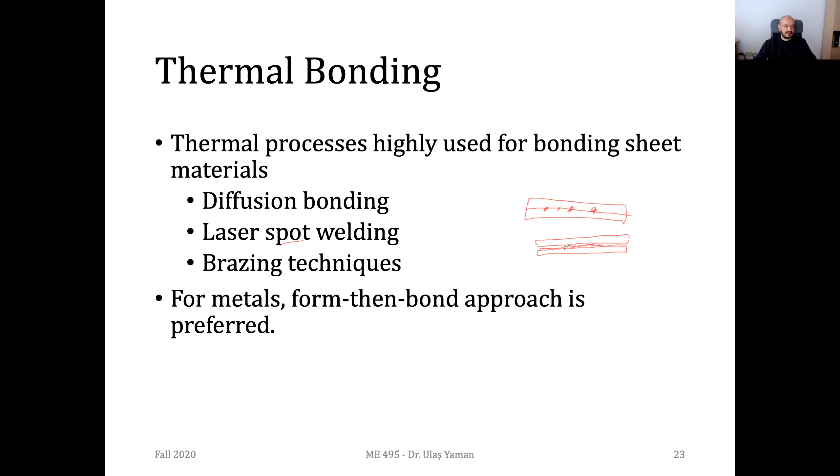Let's briefly look at a variation of sheet lamination process called shape deposition manufacturing. We cannot clearly say it's a sheet lamination process; it's a kind of combination of another additive manufacturing process and sheet lamination. With the help of other additive manufacturing processes, we obtain near net shape and then do some finishing by machining. In summary, you deposit some material and then do machining, and the accuracy, quality, and material will all depend on the type of manufacturing process you are using.

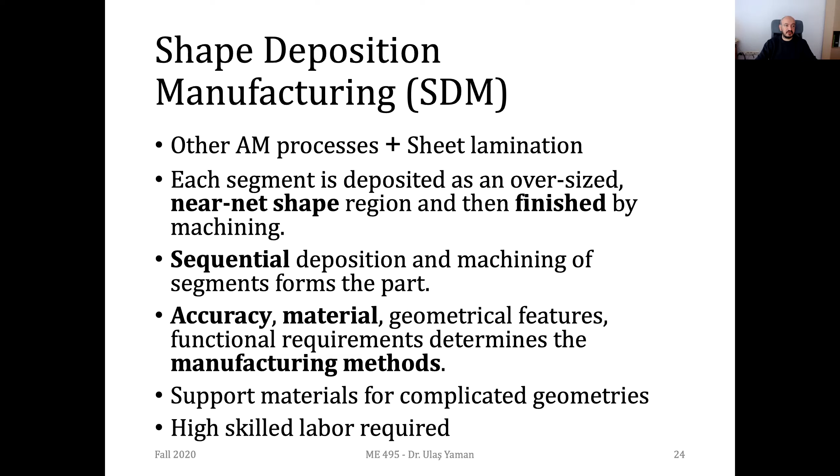If you have overhanging features, you need to use some support structure, and you need highly skilled labor to perform this specific process. The fundamental cycle is: you deposit, shape it with your cutter, and then embed some particles or components—a very nice feature of shape deposition manufacturing. You may embed sensors, actuators, or electronic boards. You can embed such a part inside and then deposit another material and again do the machining. You can continue this process as many times as you like, but we don't have an exact commercial system employing this approach.

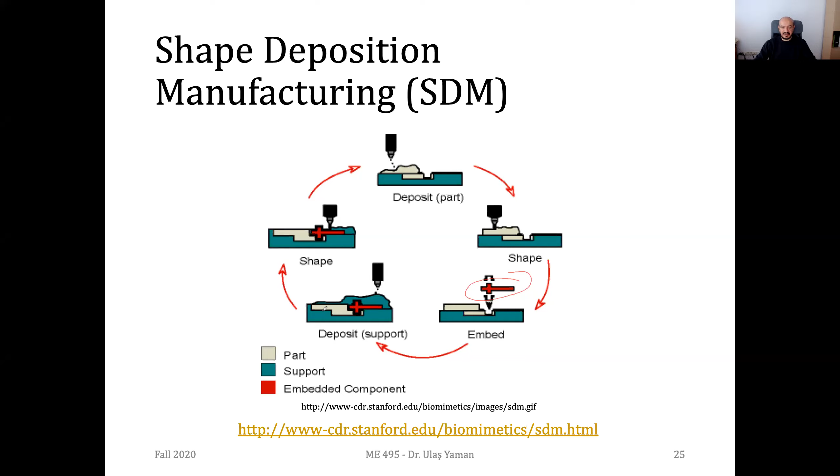Then we have another variation of sheet lamination processes called sheet metal clamping. As the name implies, we will be using sheet metals, but they will not be joined together with adhesives or other thermal bonding processes; we will simply be using clamping forces.

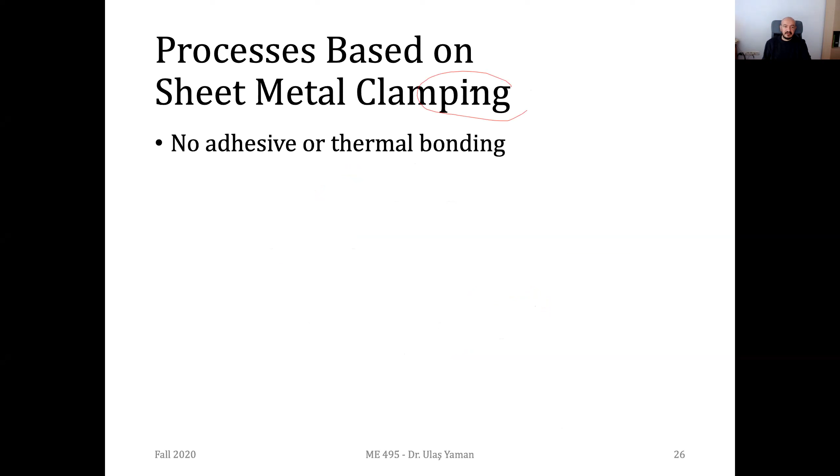And in order to have a proper clamping operation, we need to use some bolts and special clamping mechanisms so that the accuracy will be higher.

The advantage of this process is that it's very inexpensive, since all you need to do is machine the layers first and then put them on top of each other, like in the case of Stratoconception.

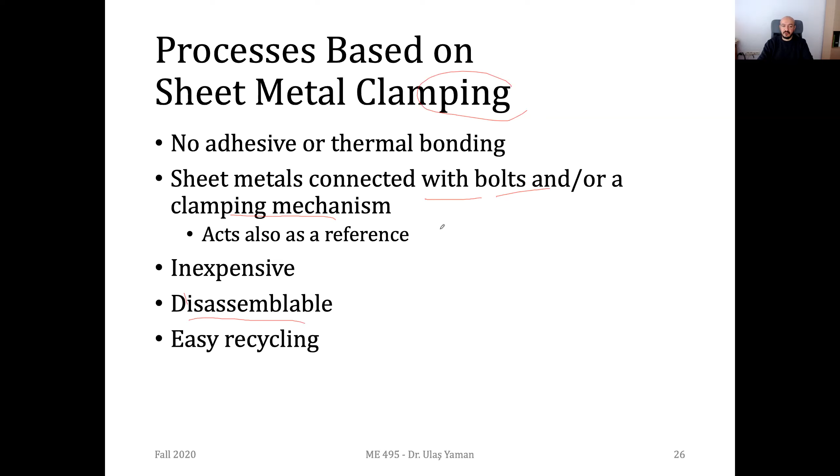Another advantage is that you can easily disassemble them by opening the bolts or screws. You can simply remove them, disassemble, do modifications, and then assemble again. Since it's quite disassemblable, you can easily recycle the unnecessary portions.

The important thing is that once you are clamping, these clamping forces should always be perpendicular to the laminate interface. So if these are the layers, the sheet metals, then your clamping force should always be perpendicular to this laminate interface, which is the interface between the laminates.

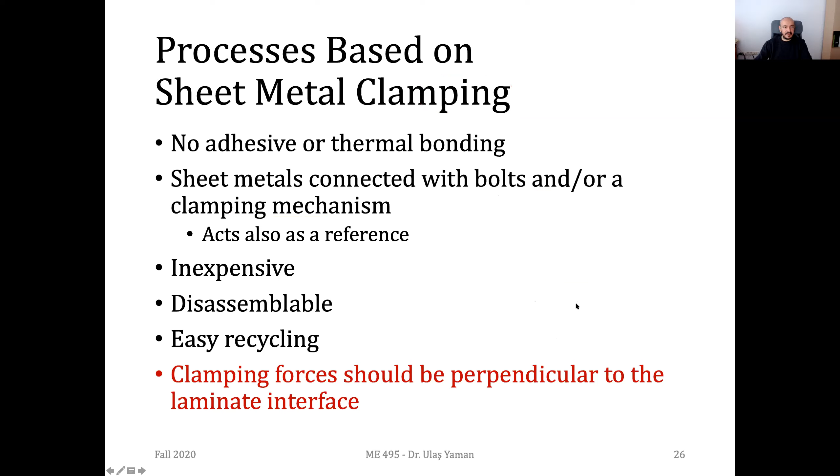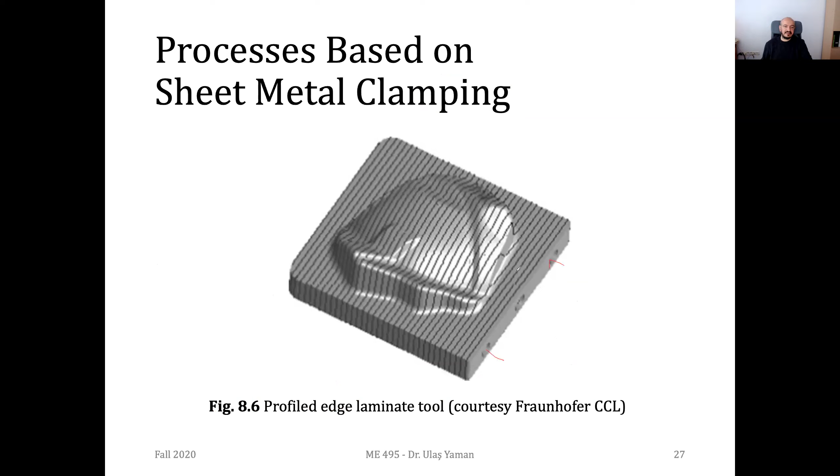Here's an example from the Fraunhofer Institute. You have these sheet metal layers, and you can see some guideways here. Probably they are putting some rods inside so that it will be easier to align these sheet metals.

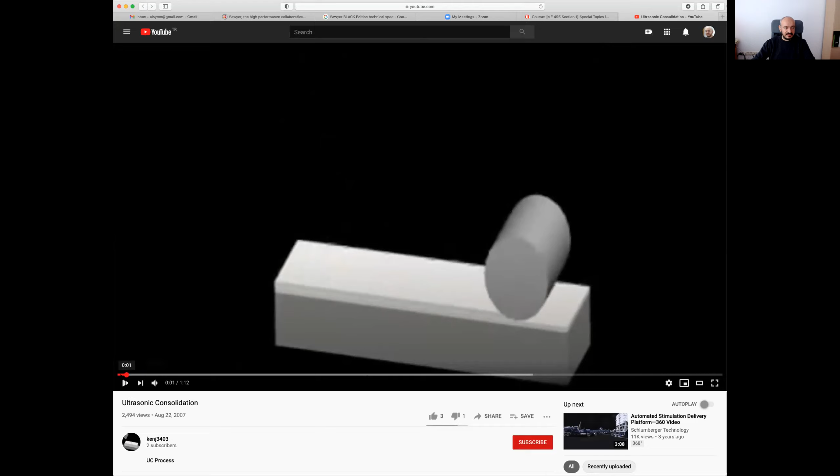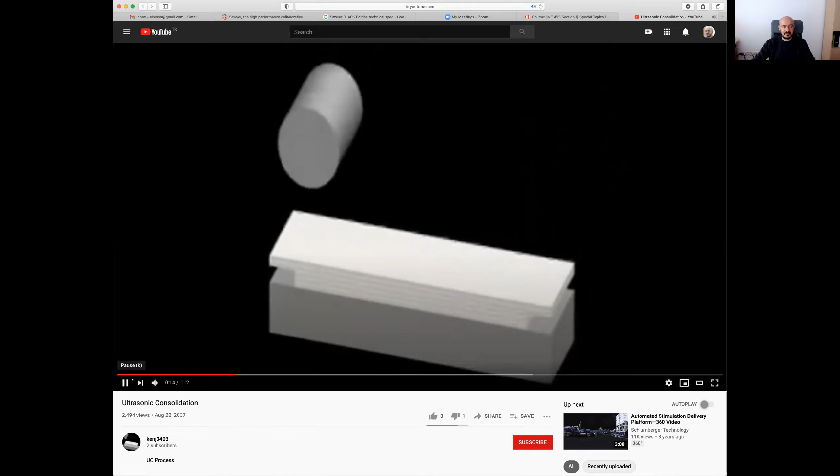This is the sonotrode bringing another sheet. Usually they laminate 4 sheet metals and then later do machining, but in this example they are laminating 3 of them and then doing the machining operation.

You see they have an internal feature, right? Since we are laminating a continuous material over the opening regions, over the channels, you can easily obtain such internal features.

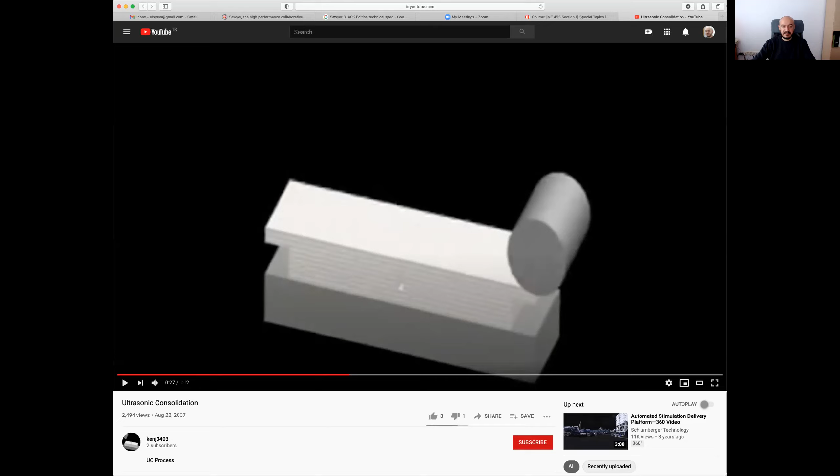But I think they are going to cut it. They don't need to cut it if you want to have a hole inside, a kind of internal feature, but depending on your case, you may do machining or not.

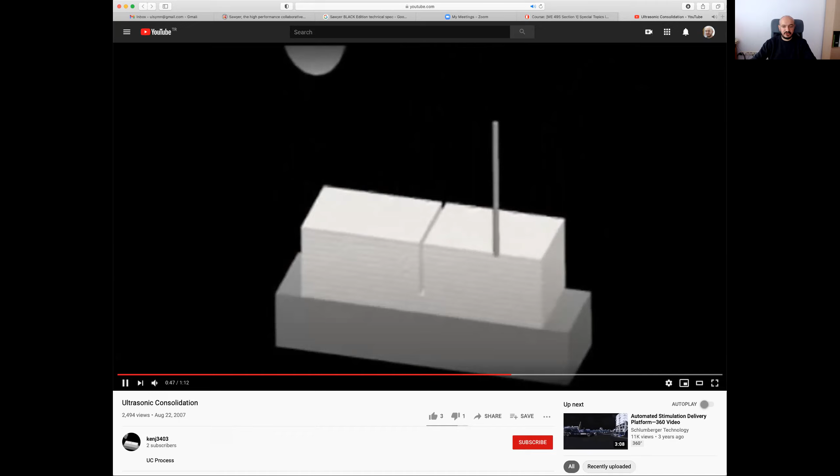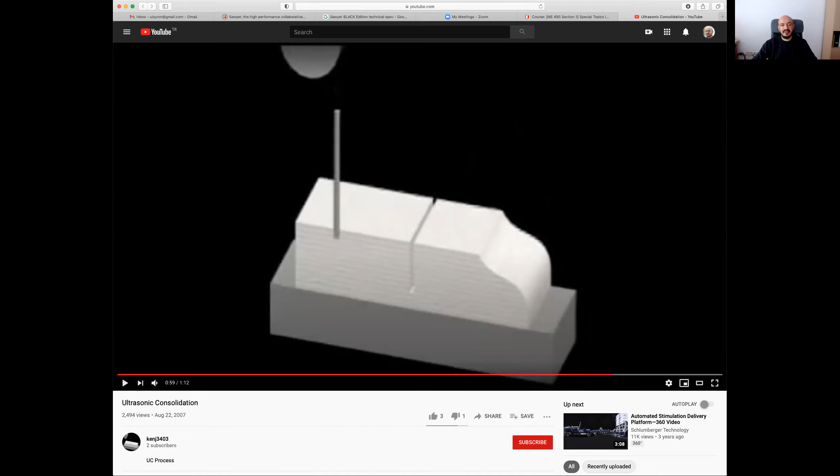Yes, depending on the machine you have, the number is usually constant, since the tool is not capable of machining just a single layer. Since it's a very thin layer, they usually have 3 or 4 layers to be machined.

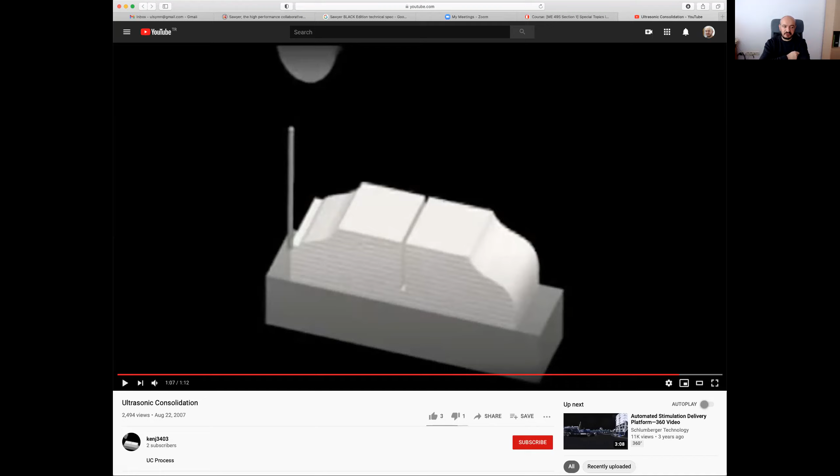But the thickness of the metal is very low. You may have just 1 millimeter, maybe less than that, depending on the type of sheet you are using. Probably that will be enough.

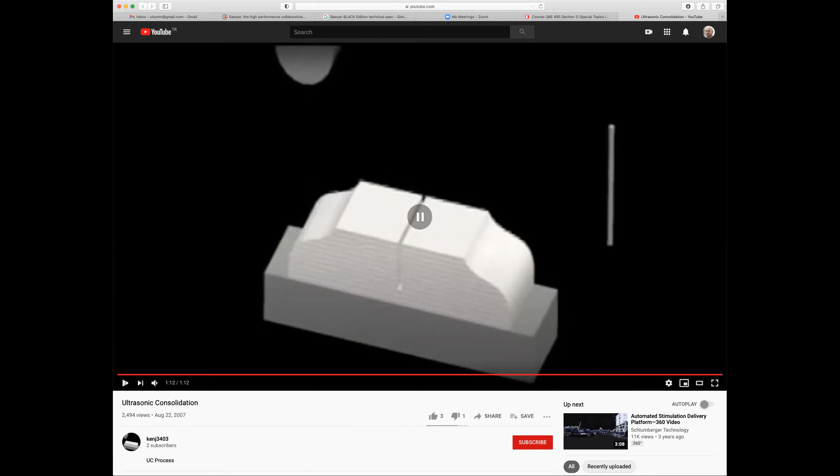So these are the fundamentals of ultrasonic additive manufacturing.

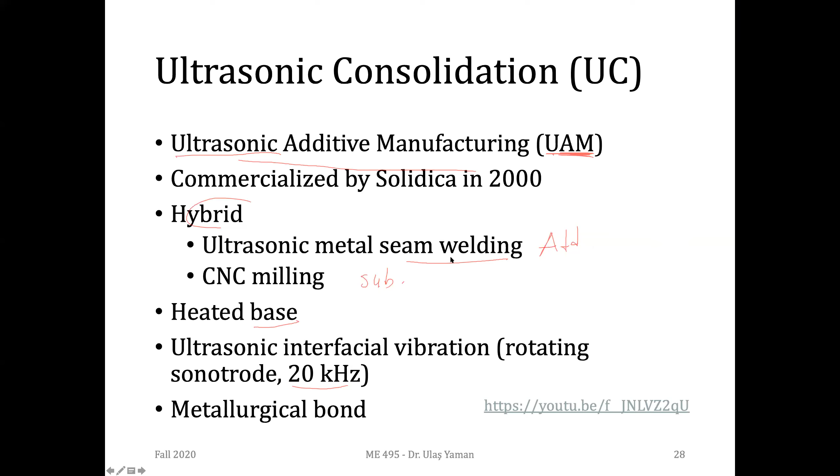Obviously, while we are doing a kind of welding, ultrasonic welding, we will have a metallurgical bond between the layers. Here's another nice illustration.

You see we start with a heated base. This is important, otherwise your foil, your sheet metal will not stick to the base platform. Depending on the thickness of your part, you may have many sheets on the same layer. As you see, right now we have 4 of them, and I think it needs 3 more, so 7 sheet metals will be spread on this layer.

While spreading it, this sonotrode is rotating and it's applying a force. This is the force applied by the sonotrode. This is a side view, by the way, showing the previous layer and the next layer. With the help of the high frequency vibration, we will have a kind of connection between the layers. This is a close-up view - this is 20 micrometers, and we will have metallurgical bonds between the layers.

And this is another side view. Our sonotrode is rotating and also moving to the left, and it's actually laying out this sheet metal.

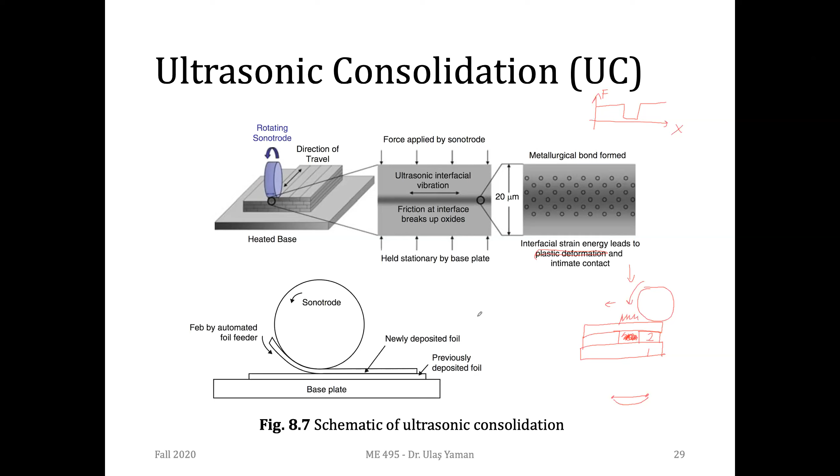We have, let's say, this is the frequency, say some hertz, and we have an amplitude, but not that much. And the frequency is exactly at 20 kilohertz.

And we need to apply force, otherwise it will just pass through the sheet metal and it will not be able to join the parts together. Force is an important issue, but the amplitude is not much. It's not moving - actually you cannot see the sonotrode moving in the Z direction. It's very little, around some micrometers.

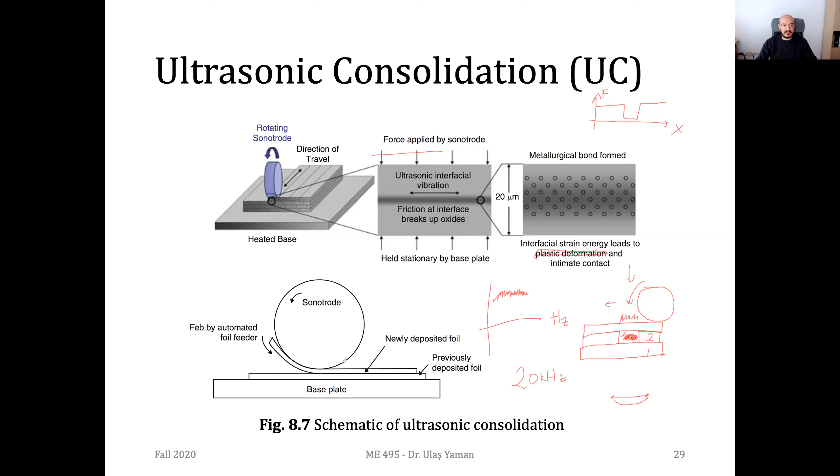In the example animation, we saw it laying out 3 sheet metals and then doing machining, but for most of the time, companies prefer to use 4 layers. They deposit 4 layers of metal foils and then do machining. We call these 4 layers one level in ultrasonic consolidation, or ultrasonic additive manufacturing.

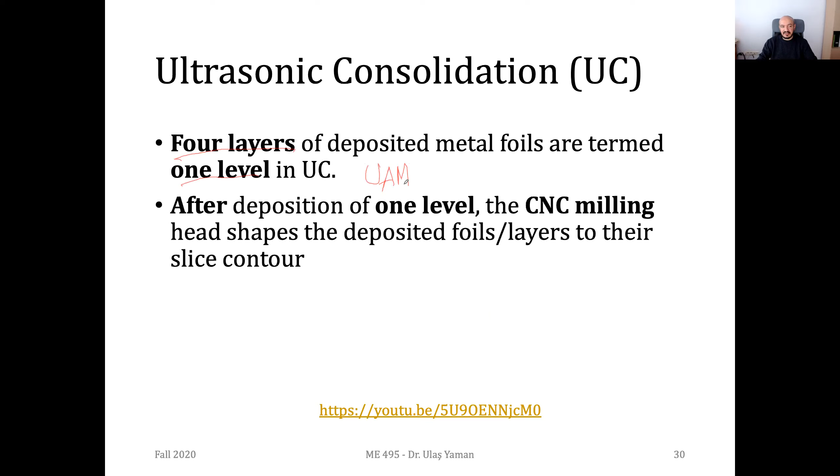After you have one level, you need to do machining around the contours. You repeat these processes until you have the final part. So you can say that this is a kind of bond-and-then-form process.

Let's have a look at this video. Let me share it. It's from Oak Ridge National Laboratory in the United States. The company is Solidica. This is again an animation, but a much better one.

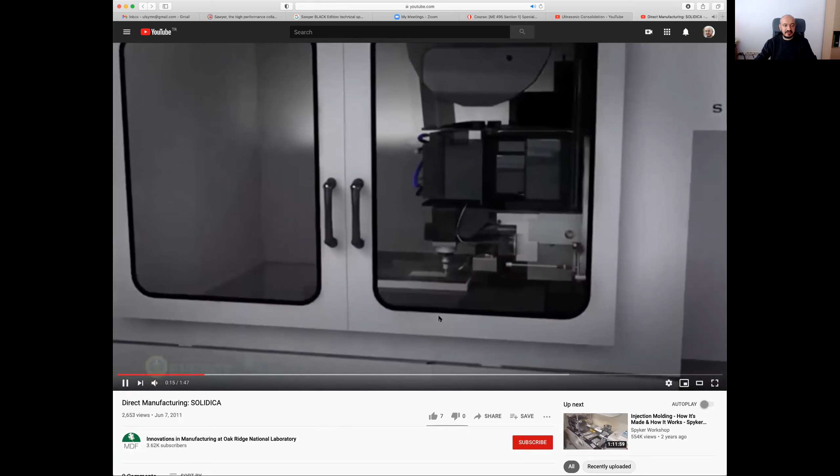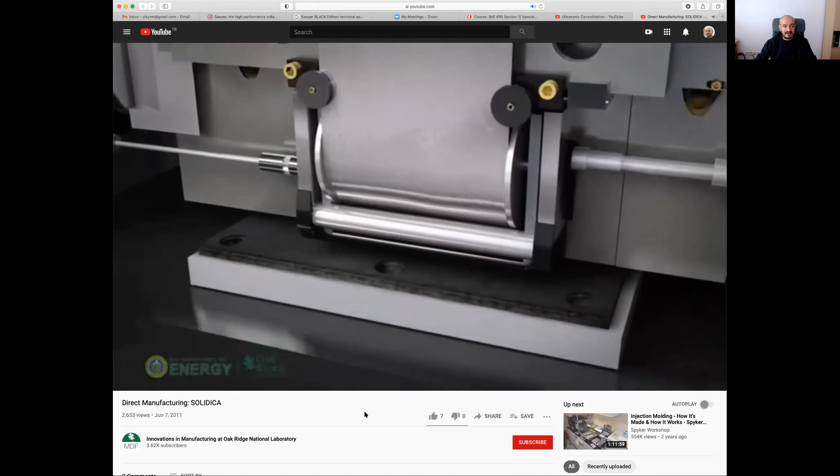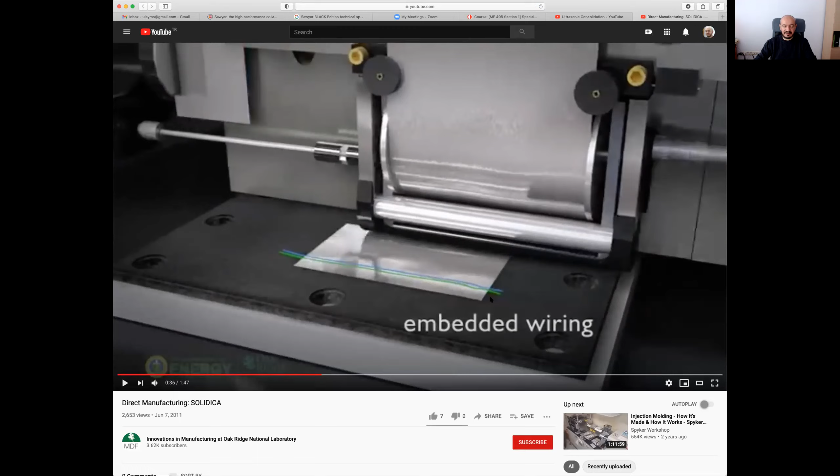Machining, and then sheet metal is deposited. Now you can see the sonotrodes underneath. The advantage of this process is you may have some components. Actually, components are quite challenging, but embedding wires is not that difficult. You can have such wires inside your part.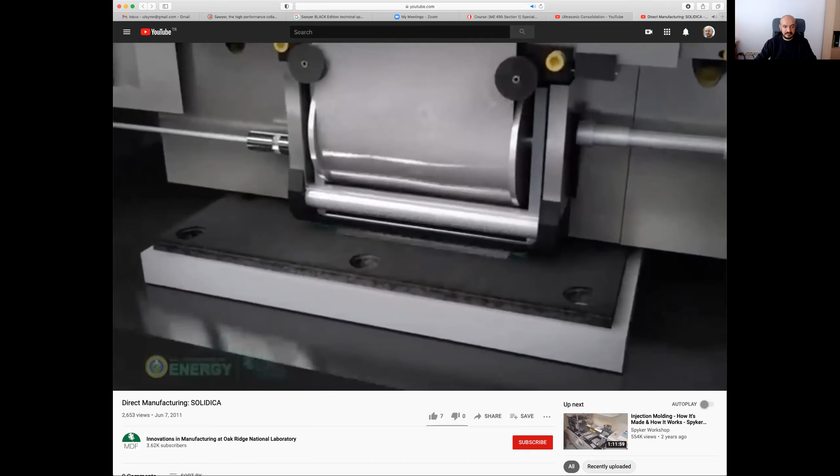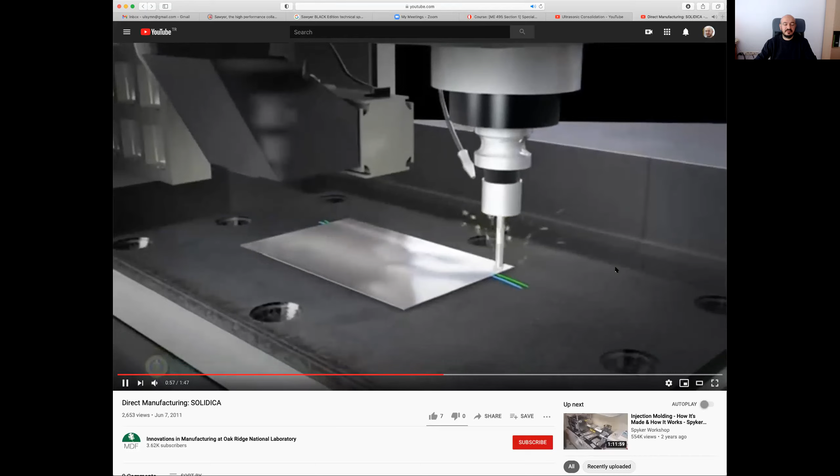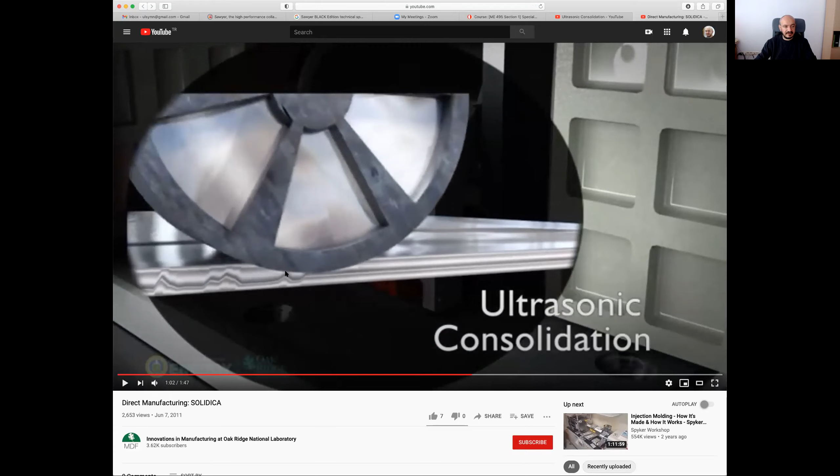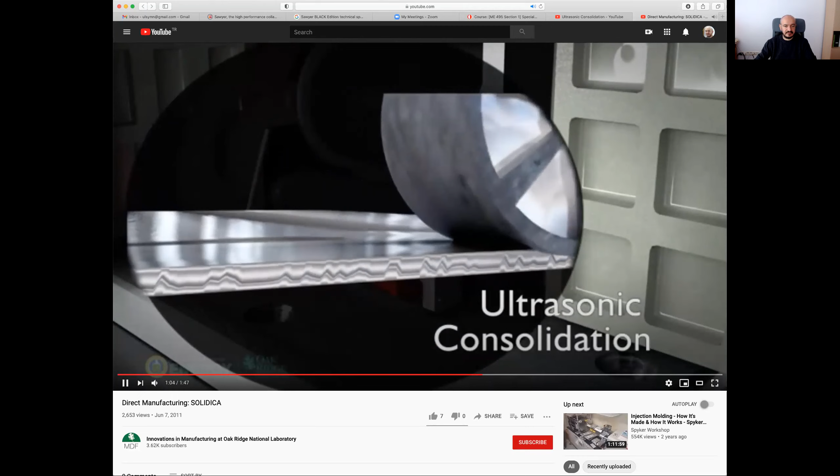Now you can see the sonotrode, and it's vibrating as you see. While doing this vibration, you have a metallurgical bond between the layers, and you'll have a stronger product. The amplitude, as you see, is not too much.

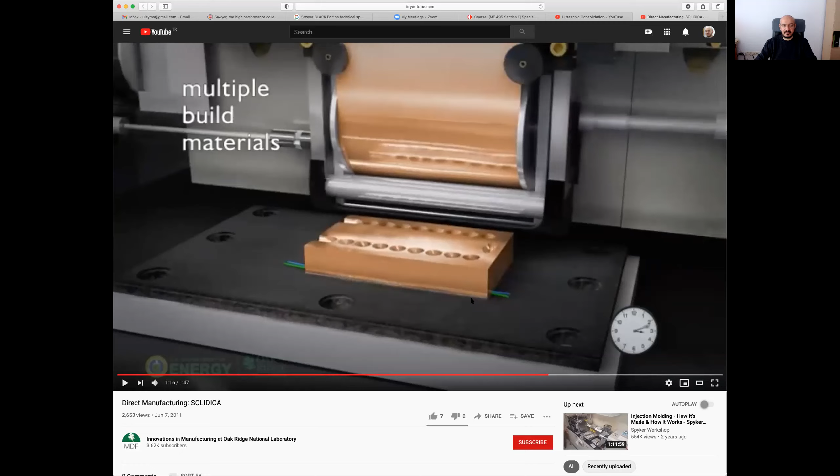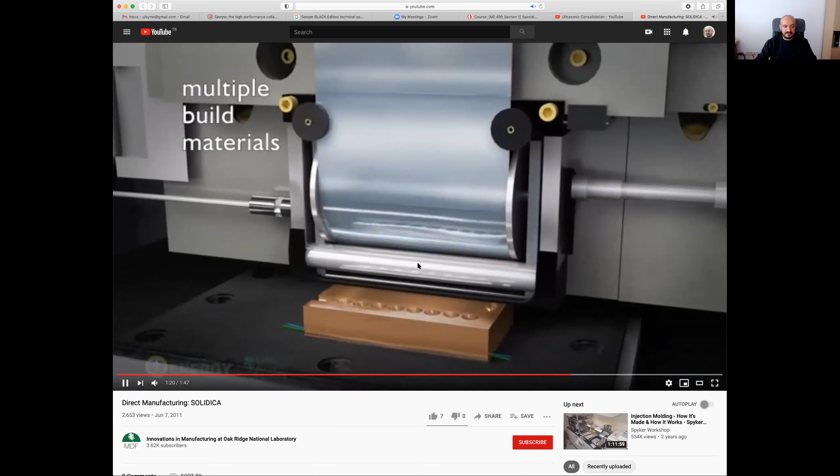Another advantage is that you may have different types of metals in the same product. As you see, initially we have some steel underneath, but right now it's depositing copper, and we have such nice features. Another layer of different material, another cable, and you can have complicated channels and close the top of these channels, which is not possible in the conventional approach.

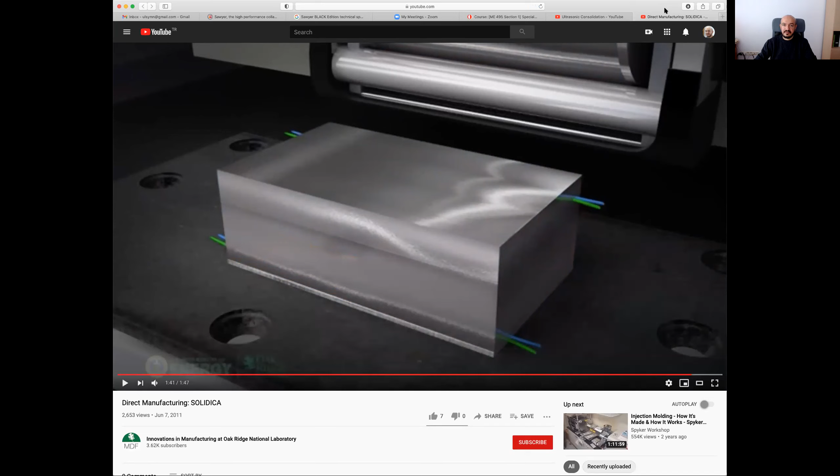Any questions, guys, on these systems? There's a question.

So the foils are actually simply bonded together. We don't have machining first, but after one level is completed, we do the machining. Overall, we can say it's a bond-and-then-form process, but the interior is not important for us.

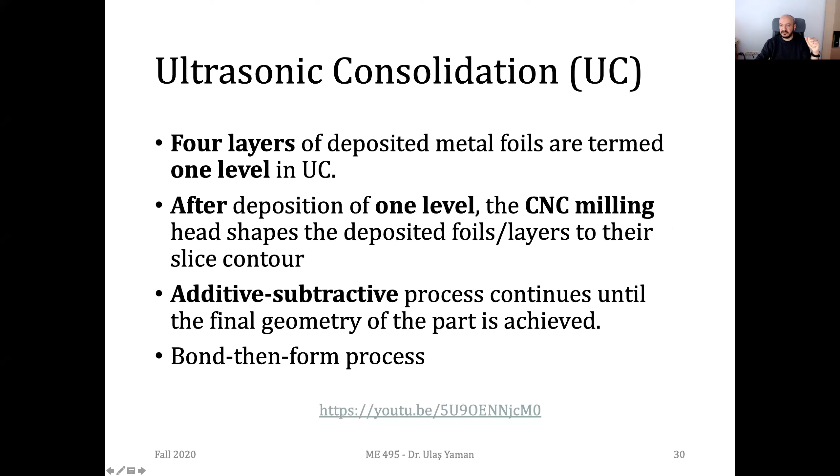Since we are using CNC machining, the overall accuracy and surface quality will depend on the CNC machining. If you use proper tools, like nose tools, in your CNC machine, you may eliminate the effect of staircasing.

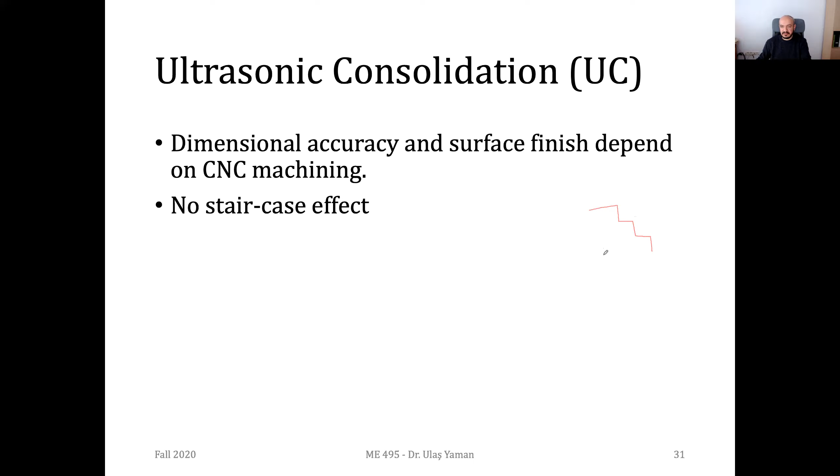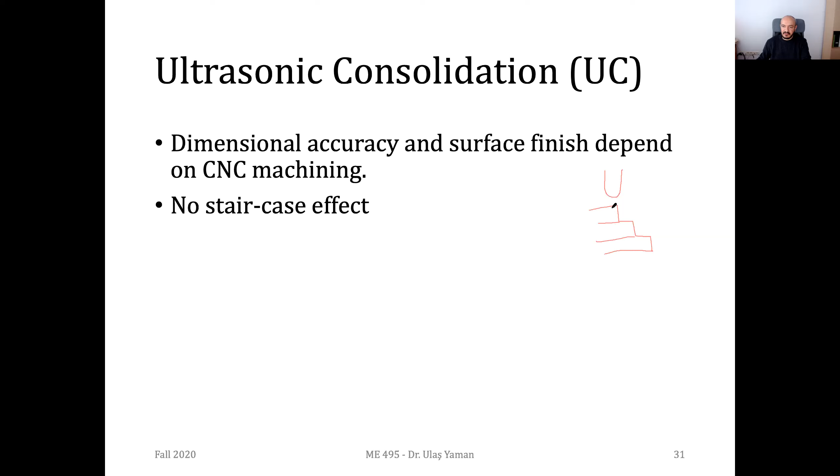For instance, you have such a side surface, and these are assumed to be some layers. If you use a proper tool, like a nose tool, you can eliminate this staircase effect, which is a nice property of this machining.

You can obtain very complicated, functional parts, having wires and complex features inside. You may have multiple materials. If you're careful enough, you can even embed special sensors, actuators, and other optic products.

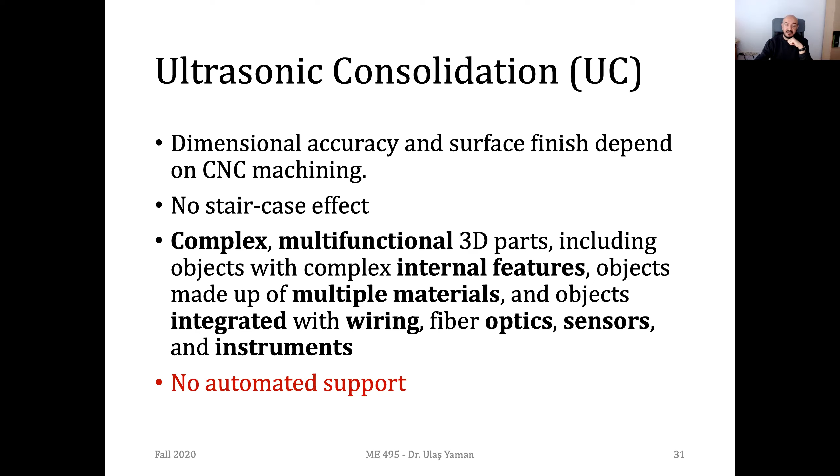Another drawback of this approach is that you don't have a special support structure mechanism. As we discussed in the previous slides, if you have critical internal features, wider internal features, or overhanging features, you need to think about support. Otherwise, there might be deflections on your overhanging and internal features.

Let's have a look at this example. Our aim is to obtain a panel having honeycombs inside. For that purpose, we are using ultrasonic consolidation with aluminum 3003 material. We start with a heated base.

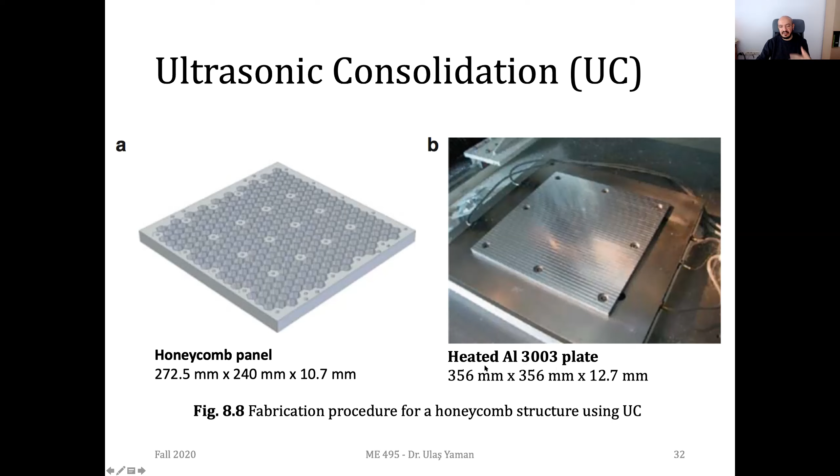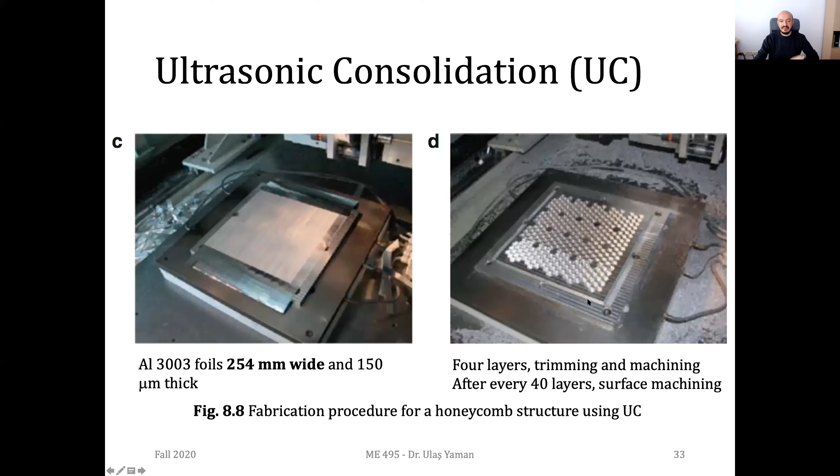Now you'll see that we'll be adding these sheet aluminum layers one by one, then doing some machining or trimming operation. As you see this time, I think they are again doing machining after 4 layers, but they do surface machining after 40 layers, meaning the fabrication is over and they can clean the top surface of the product.

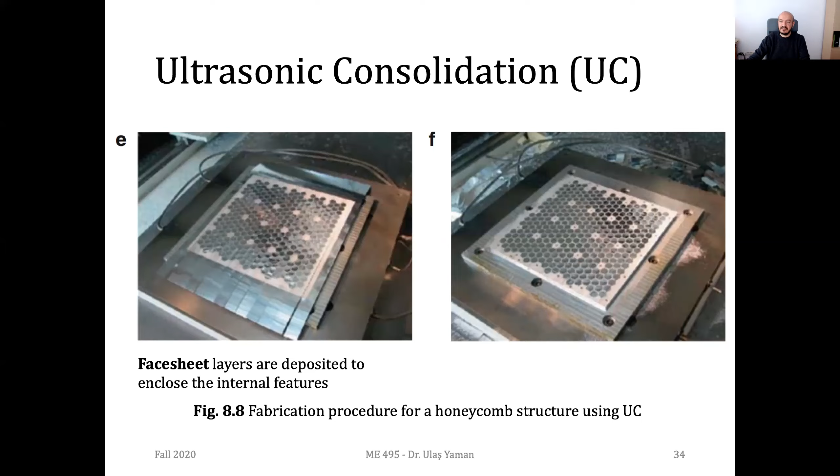So now let's discuss the quality between the layers. The ultrasonic consolidation bond quality, or ultrasonic additive manufacturing bond quality, has two parameters defining it: the first is linear weld density, and the other is part strength.

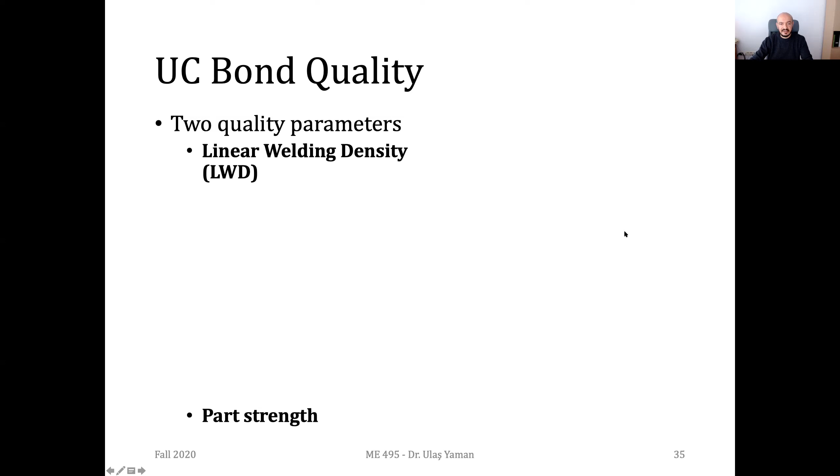Obviously, you can obtain and compare the strength of your part by doing some experiments. But for the linear welding density, we need a cross section. This is the base plate, and we have one layer starting here, another here, another, and another. So we take a cross section of the product and check the welding density.

So how do we do it? Assume this is the width of the part we're looking for, and you can look at the impurities along this line. At the interface between the base plate and the layer, we don't have any openings. But if you look at the interface between layer 1 and layer 2, we have some impurities and disconnected regions, and you can compare the percentage of these regions with respect to the length of this cross section. By using that, we can easily obtain the linear welding density.

And obviously it's 100% for the interface between the first layer and the base, but it's less in the upcoming layers. Actually it's the least between the third and fourth layers, maybe around 60% or 65%, I don't know.

Another thing is that if you look at the top surface, we have bumpy regions, right? This is the top surface, and why do you think we have such a case? It's just due to the force applied by the sonotrode and the system. The surface roughness depends on the quality of your sonotrode and also the amount of force you're applying on the part.

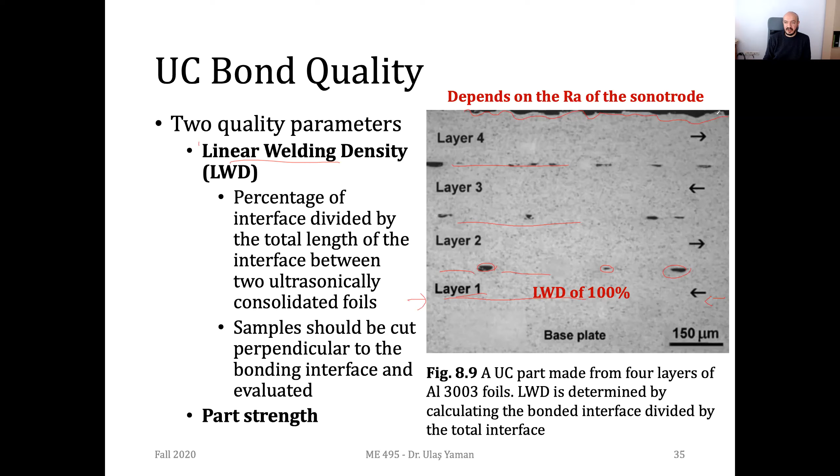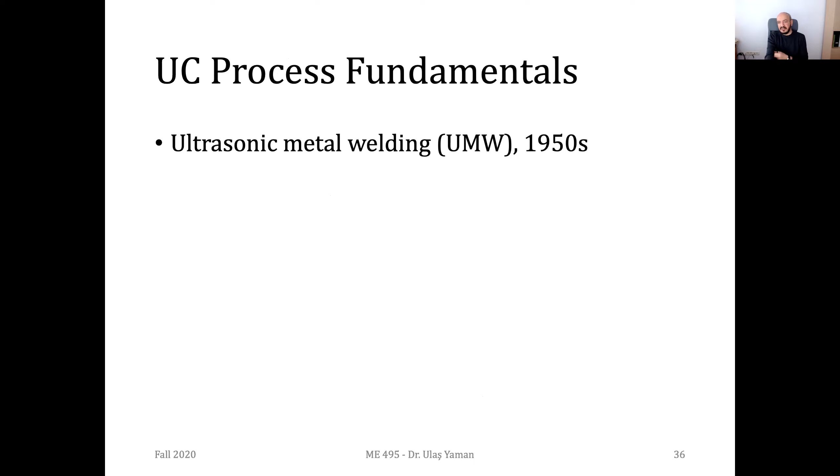So let's look at some basic history of this process and other fundamentals. It was invented in the 1950s - not the whole additive manufacturing process, but the welding process itself. People are using this ultrasonic metal welding process in different industries, especially automotive and electronic industries. The thing is, we don't have high temperature.

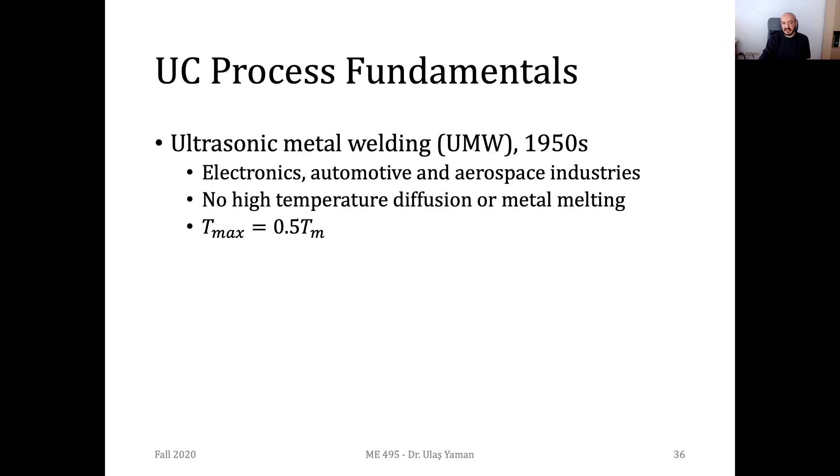We are not joining the metals by heating them. We don't have thermal bonding. This is the main advantage, and that's why people prefer to use it, especially in the electronics industry, since high temperatures would probably damage electronic components. With ultrasonic vibration or welding, you will not have high temperatures. The maximum temperatures in this process are usually about half of the melting point temperature of the material, or usually less than that value.

In this welding process, the bonding is obtained by mechanical interlocking. The parts go inside each other, or if you have interface materials, they will be melted and joined together, or you might have some plastic deformation and diffusion, or atomic forces across your nascent metal surfaces may help join these sheet metals together.

Another advantage is less thermal stresses and less thermal deformation in this ultrasonic consolidation or welding process. Since the temperature is not high, the possibility of generating thermal residual stresses is very low compared to other joining processes. Here you see an example.

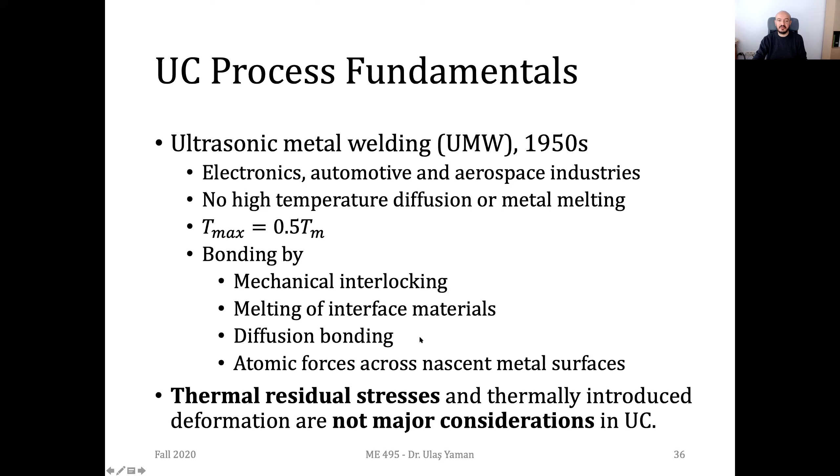So here you see we have sheets of aluminum, bottom layer and top layer, and in between we are embedding a stainless steel kind of mesh. It's a very specific case - I think this should be from a study, a research. They are trying to embed such a stainless steel mesh in between.

And if you look at the interface here, in some regions we have metallurgical bonds, but in some regions we don't have any. For instance, here in the white arrows, we don't have any metallurgical bonding between aluminum and the stainless steel. So they put this mesh just to increase the quality of bonding between aluminum layers. But it's not a must - it's just for research, to check whether this increases the strength or not.

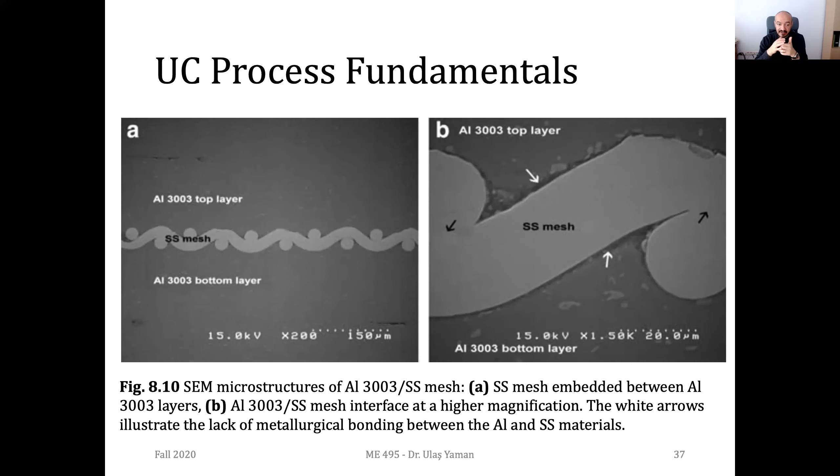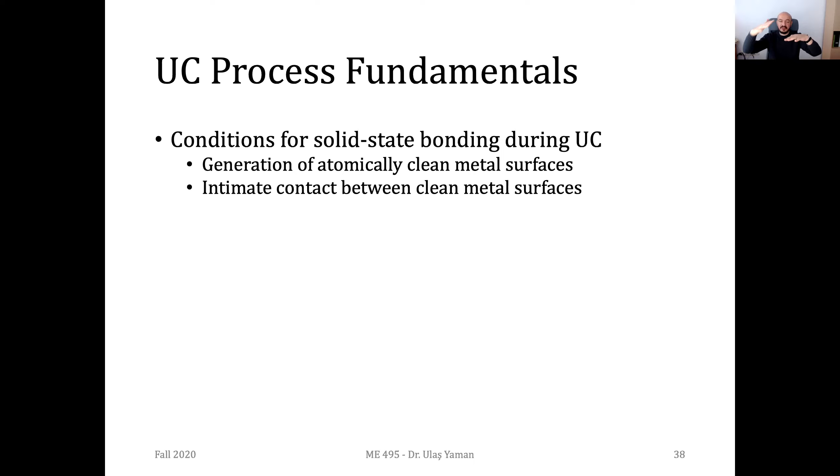So what are the basic conditions for bonding in ultrasonic consolidation? First of all, you need to have clean surfaces. If you have any oxidation or particles, dust on your surfaces, then you cannot have proper bonding between the layers. This is the first thing you do - you need a clean metal surface, and you shouldn't have any bumps on the sheet metals you have.

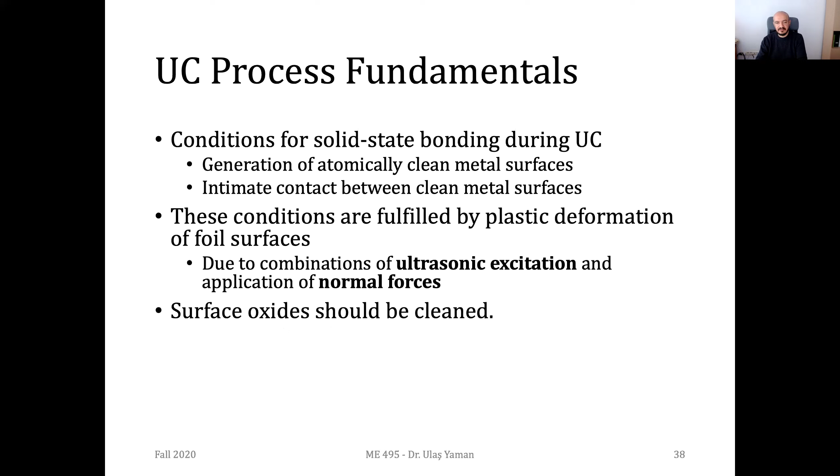You should make them clean and smooth. Once you satisfy these initial conditions, then you can start plastic deformation with the help of ultrasonic excitation and the normal forces on the sonotrode. So for that purpose, in the cleaning stage, you need to remove oxides on your surface. Otherwise, as we discussed, you cannot start the plastic deformation.

So we have such a statement. Let's read it and let me ask you why it is stated like this: due to a significant hardness difference between aluminum and aluminum oxide. So we have aluminum and aluminum oxide, and there is a huge difference between the hardness values of pure aluminum and aluminum oxide, which is where we have oxidation on the surface, and that's why these sheet metals are usually preferred for the ultrasonic welding process.

So why do you think is that? Why do we prefer to have aluminum if you just look at the initial statements? Why does hardness actually help in the ultrasonic welding process? No answer?

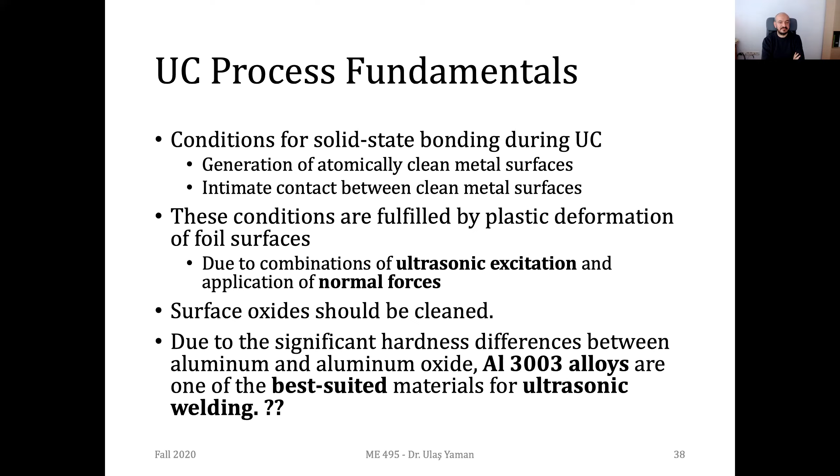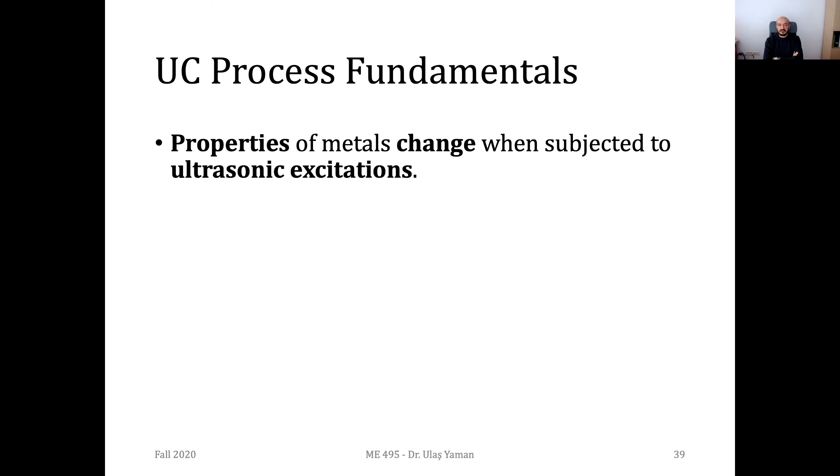Okay, then let's have a look at other properties. Once you apply high frequency vibration, some of the properties of the metals will obviously change, and some of these properties will be nice for joining. For instance, if you have huge vibration, you will be doing a kind of acoustic softening, and with the help of it, it will be easier for us to start the plastic deformation with less forces.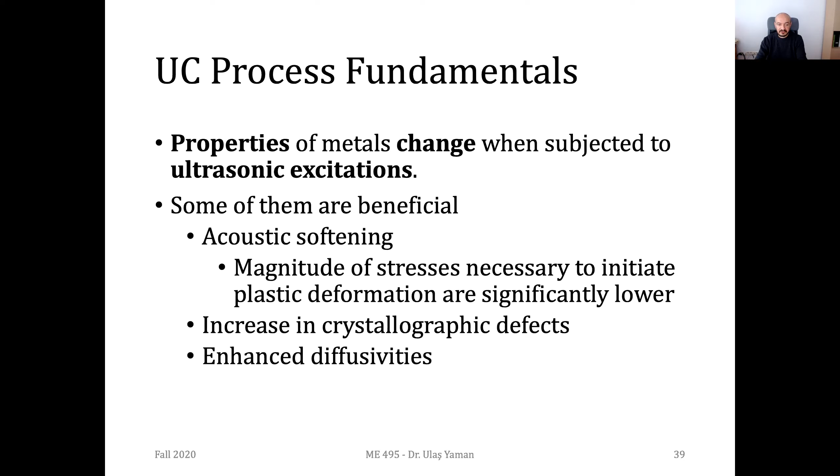Another thing - you may have some defects increase, which is not a nice property. You may have some cracks inside your microstructures, or you may have some diffusivities, which is a nice property, so the microstructures or the parts will be joined in a better way.

So now let's have a look at some parameters in this process - how we are going to optimize these parameters to have a proper ultrasonic consolidation or ultrasonic additive manufacturing process. What are the important parameters? The first one is the amplitude of our oscillation, the value of these oscillations, the normal force we are applying on the sonotrode, the speed of the sonotrode, and the temperature in the environment, and also the temperature of the sonotrode. They will obviously affect the quality of overall bonding between the layers.

So let's discuss some of these. What happens if you have high speed? Do you expect a better bond or a worse bond? Worse - usually it will be worse if you do not spend enough time on a specific point, because that means you'll not be applying enough energy to that point.

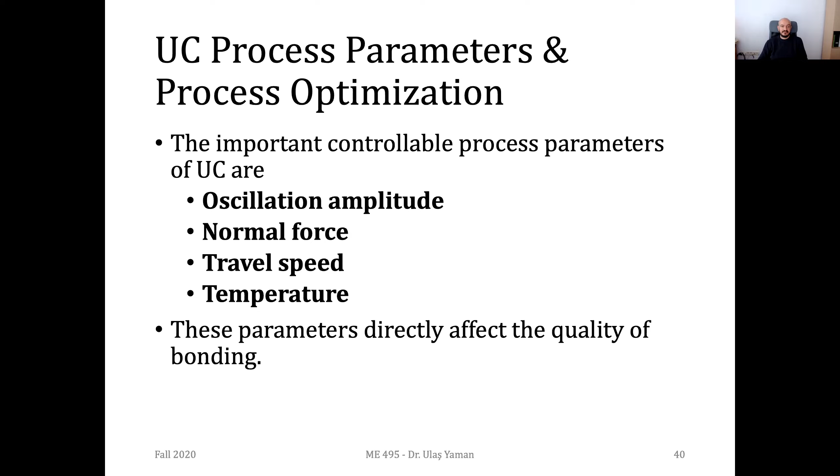It's very similar to other processes like polymerization or melting. We have a critical value for the energy - if you do not go over that critical energy value, you cannot join the sheet metals together. So depending on your other values, you mostly have a lower speed. What about the normal force? Can you comment on how it's going to affect the quality - for instance, what happens if you have less force?

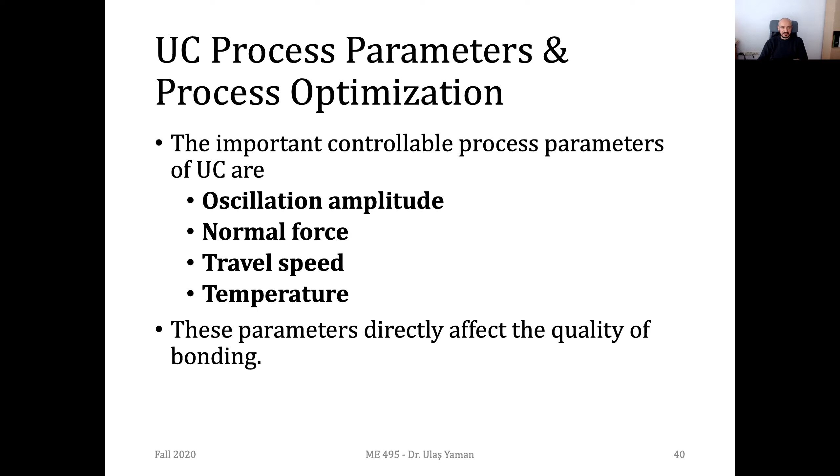Layers will not bond, but if the force is too much, it will deform and harm the product. So we need to find an optimal force value. If you have too much force, the surface roughness will be higher, and in the next layer, that high surface roughness will not let you join the new sheet metal to the previous one. So these parameters should be optimized to have a perfect bond between the layers.

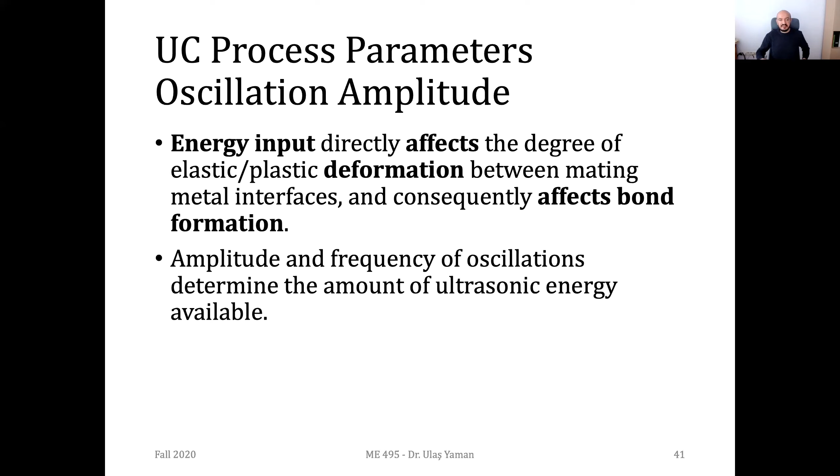Let's look at the first one, the amplitude of the oscillations. The energy input is quite important, so this level should be above a critical value, otherwise you won't be able to start a deformation and the metals will not be joined together. The energy is defined and affected by the amplitude and frequency of these oscillations. Since the frequency is constant, around 20 kilohertz, we can assume that as a constant value. So if the frequency is constant, we can only play with the amplitude of the oscillations to adjust the amount of energy we are applying on the parts. This is the only thing we can play in terms of ultrasonic energy.

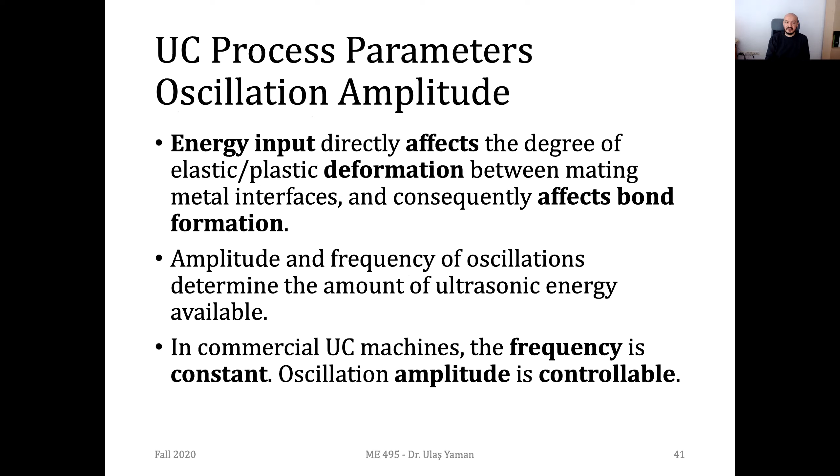Depending on the material you are using, you may have higher or lower amplitudes. If it's a soft metal, you can do the joining with low amplitude oscillations. But if it's a difficult material, you need to increase your ultrasonic energy by increasing the amplitude of your oscillations.

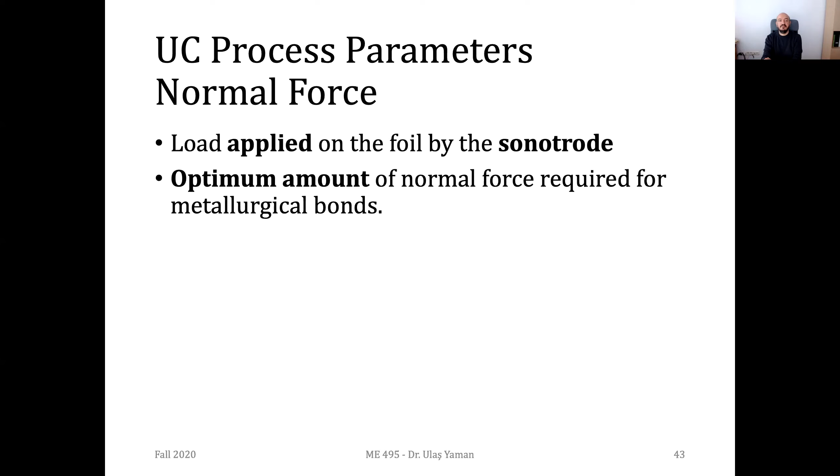Now let's look at the normal force, the importance of the normal force. It's the load we are applying on the moving, rotating sonotrode, and the optimum value of this force is highly important to have metallurgical bonds. We shouldn't have it much higher or lower. If you have lower or higher forces, the quality of your bonding or the linear welding density will be low compared to the optimum value. If you have higher forces, the previous layers or top surface will be deformed and the upcoming interfaces will be affected.

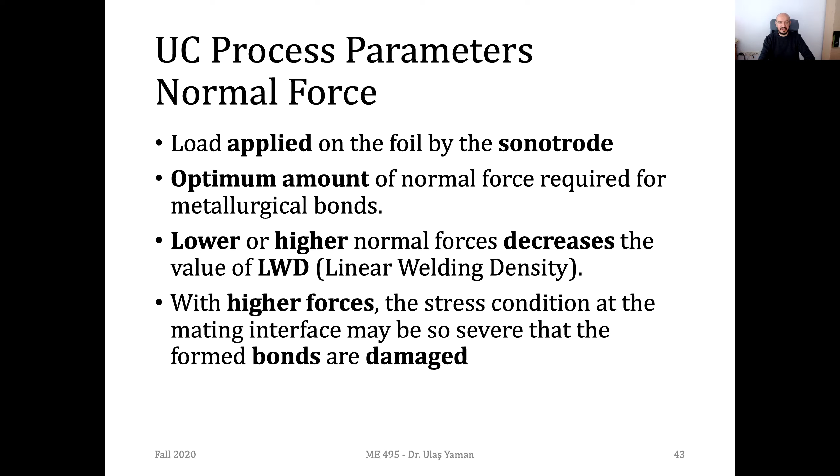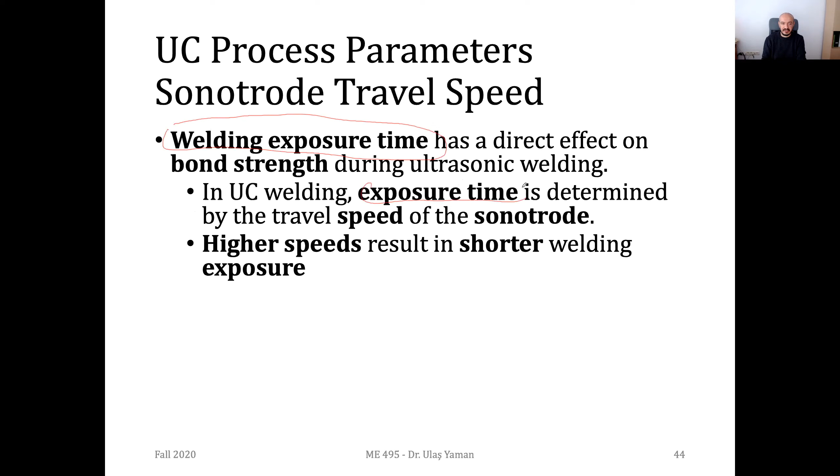Another issue, if you have lower speeds, you will be increasing the ultrasonic energy you are applying on the layers. And if that's the case, you will be deforming the layers, and also decreasing the fatigue life of your product.

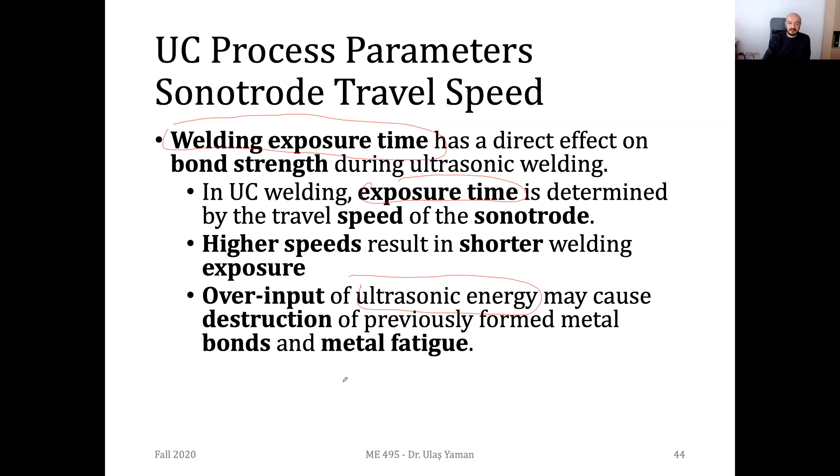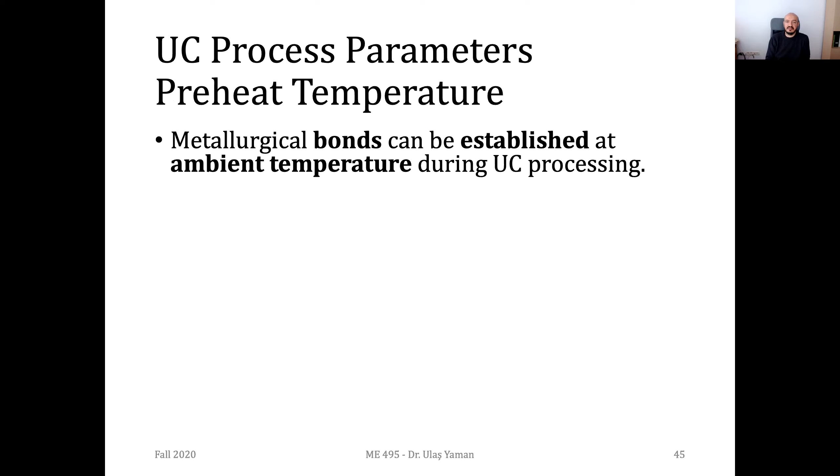Now we have preheat temperatures. If you have ambient temperature around 100 or 200 degrees, that may help you join the parts easily. This ambient temperature depends on the material you are trying to join. If it's aluminum, you should keep it very low, but if it's steel, you may increase it to maybe 300 or 400 to make your joining easier. For aluminum, the ambient temperature is usually around 150 degrees. With the help of it, you can reduce the flow stress, which means with low applied forces, you can start the plastic deformation. But if you have high ambient temperatures, then you have the problem of foil sticking to the sonotrode. If the sheet metal is sticking to the sonotrode, you cannot continue with the additive manufacturing process. You should stop and clean your sonotrode, and this will cost you a lot.

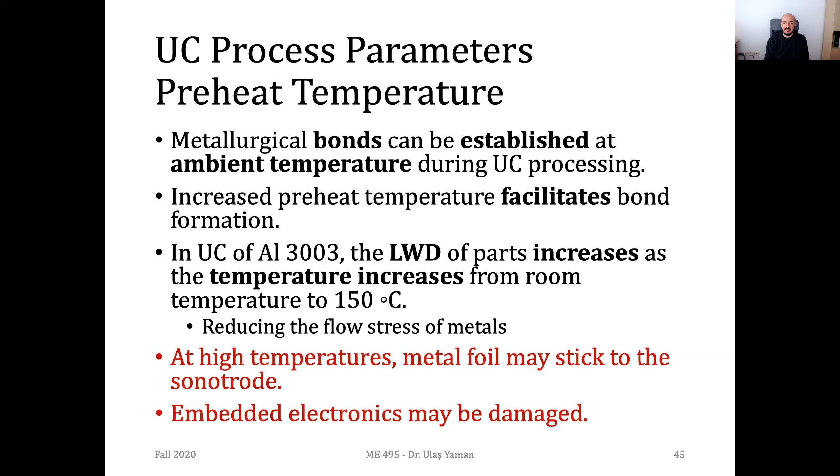Another issue about high temperatures: if you have embedded electronics, other components, actuators, sensors inside your part, you can harm these products, and that will cost you a lot once again. Any questions, guys?

Now let's briefly talk about the defects we have in the microstructure or on the surfaces. First of all, you might have some voids between the interface, and it's the most common problem.

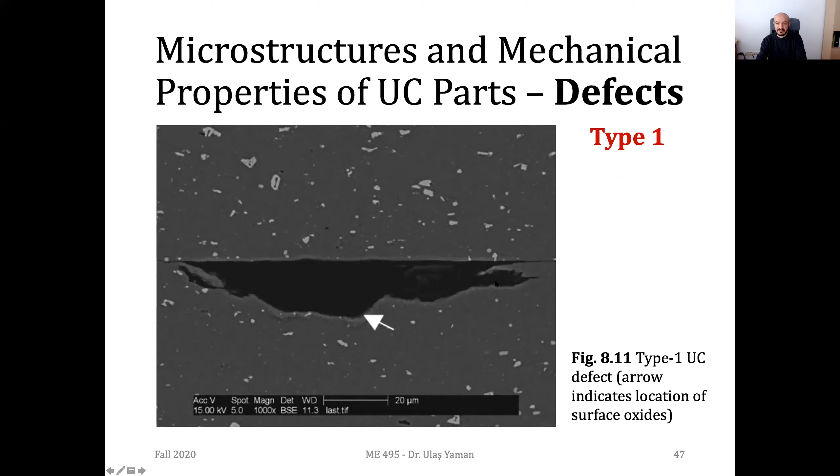Now let's have a look at these. This is the first type of defect, and you can see some surface oxides here, and these are resulting in such irregular shapes between the layers, and this part will not be able to join to the previous layer. If you look at our type 1 definition, it's due to the foil surface roughness, insufficient energy, or oxide layer. So we have oxidation here, and that's why it's called a type 1 defect.

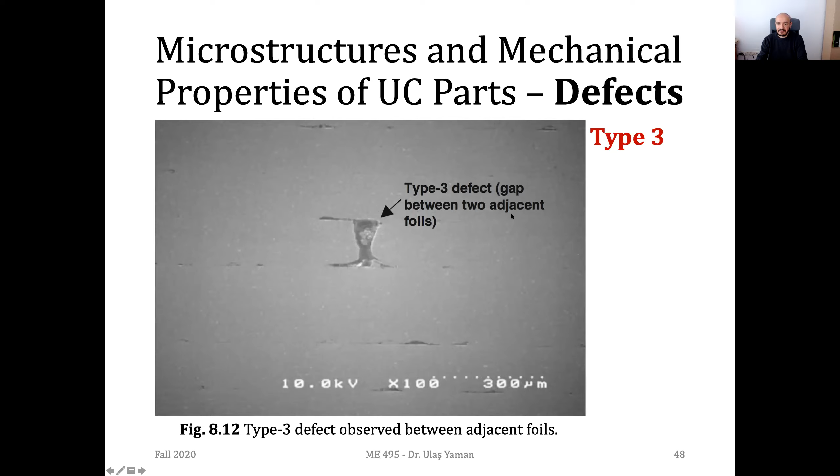And then we have type 3 defect, as I have drawn, this is a top surface of the part. We have some foils deposited on the same layer, and as you see, this one is a bit shorter, and we have some gaps in between. They are all type 3 defect, the gap we have between adjacent foils.

So how are we going to eliminate these defects? Since these defects are obviously affecting the strength of our product, we need to remove them by doing some modifications on the parameters, or maybe using some specific equipment. To increase the strength, we need to first increase the linear welding density. The interface between the layers should be proper. Another thing we can do is minimize the type 3 defects, which are defects on the top surfaces on the same layer. If you have gaps between adjacent foils, that's type 3, and we can simply eliminate it by properly depositing these foils on the layers.

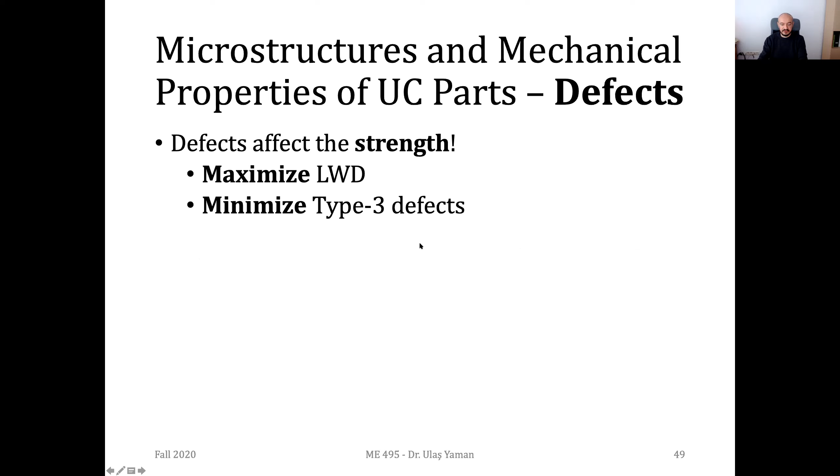So once you optimize your parameters, you can actually decrease or maybe totally eliminate type 1 defects and type 3 defects. They can be minimized, but if you have fully optimized parameters, we can totally eliminate type 2 defects. Why do you think that is? We don't have full control on type 1 and type 3, but we can totally get rid of type 2 defects with optimized parameters. So what do you think? Let me go back to the definition of these types. We are stating that type 1 and type 3 can be decreased once you have optimized parameters, but we can eliminate type 2 totally.

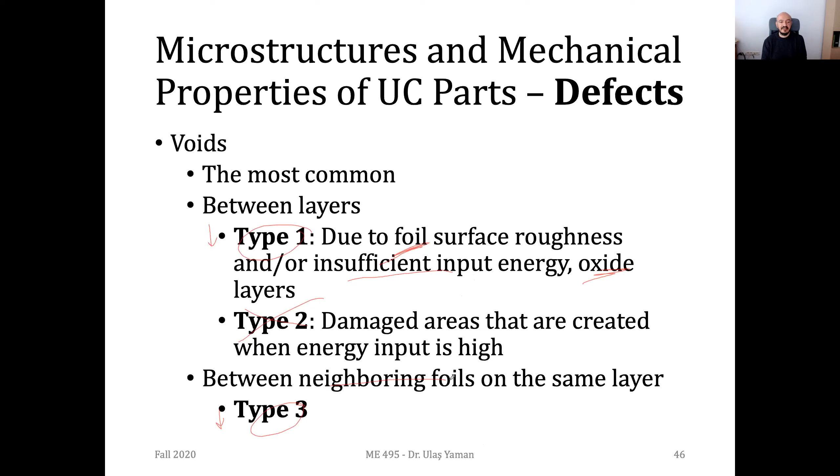Yeah, these are all not related to the parameters we discussed. They depend on the quality of foils you have and the oxidation on the foil, so we cannot easily control them. But once you have sufficient input energy, you may decrease it, but you cannot totally eliminate it. And regarding the third one, if your foils are, let's say, tilted a little bit, you may have gaps between the adjacent foils. So again, it's quite difficult to eliminate the type 3 defects totally.